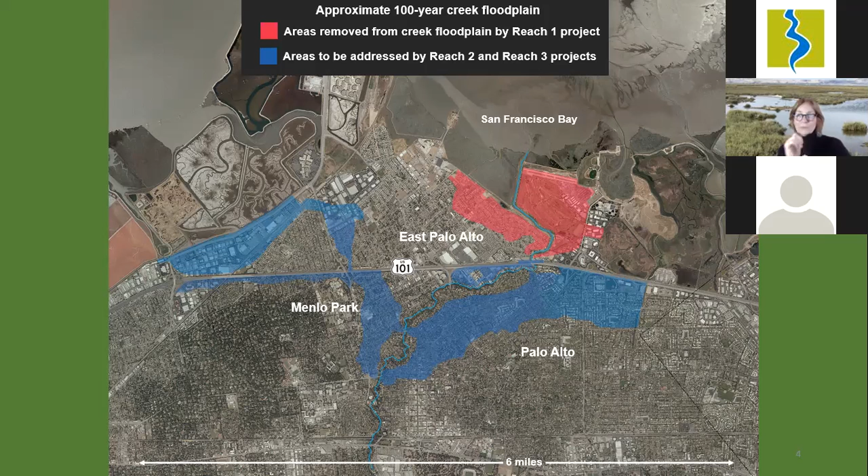This slide shows an aerial view of the San Francisquito flood zones. With the completion of the Reach 1 downstream project, the red areas that you see in Palo Alto, in East Palo Alto, close to the bay, have been removed from the risk of creek flooding. But some of this area is still vulnerable to storm and tidal flooding and sea level rise from the bay. The areas in blue are still vulnerable to creek flooding from areas that break out along the creek between Pope-Chaucer Bridge and Highway 101. And you can see how far that flooding can spread away from the creek banks.

These images are of high water and flooding events along the San Francisquito Creek. There are many properties vulnerable to flooding. In Menlo Park, there are about 800 parcels. In Palo Alto, about 2,100 parcels. In East Palo Alto, 2,900 parcels, particularly those west of Highway 101. The parcels located east of 101 are now protected by the completed Reach 1 downstream project.

Today, properties with mortgages located in the FEMA floodplain must pay flood insurance, which can cost thousands of dollars a year. And according to recent reports, and some of you might have heard a news report just a day or so ago, the FEMA flood insurance program may be raising the cost of flood insurance significantly in the coming years. So we are keen to address that cost impact to our community members.

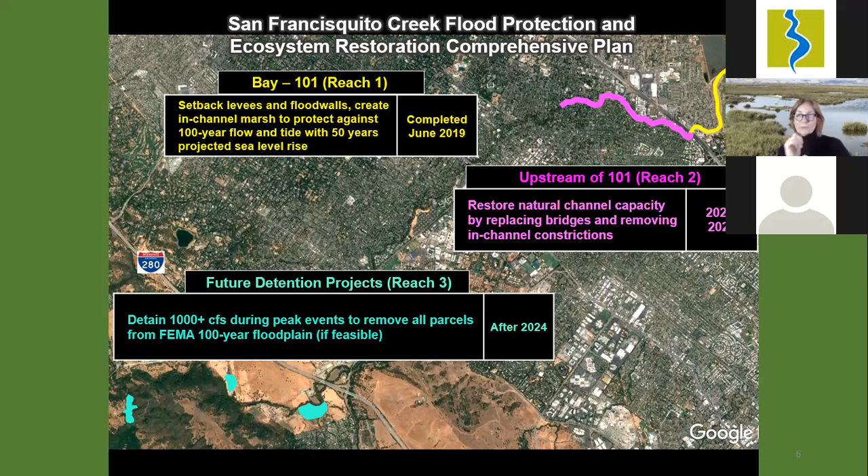Our public process. So many of you have probably been around long enough to know that the JPA went through a CEQA process, but some of you may be new to the JPA and new to this flood mitigation project that we are undertaking. So this is just to quickly acquaint you: the San Francisquito Creek Joint Powers Authority's projects are subject to the California Environmental Quality Act, or CEQA. This Reach 2 project went through an environmental impact report. There were public scoping meetings held in Palo Alto, East Palo Alto, and Menlo Park, and there was an extensive additional stakeholder engagement process.

So if you are new to the area, or if you're unfamiliar with the project, we're very glad that you're joining us now. Please feel free to reach out to me or anyone on my team for more details about the creek, its history, our project plans, or any other details.

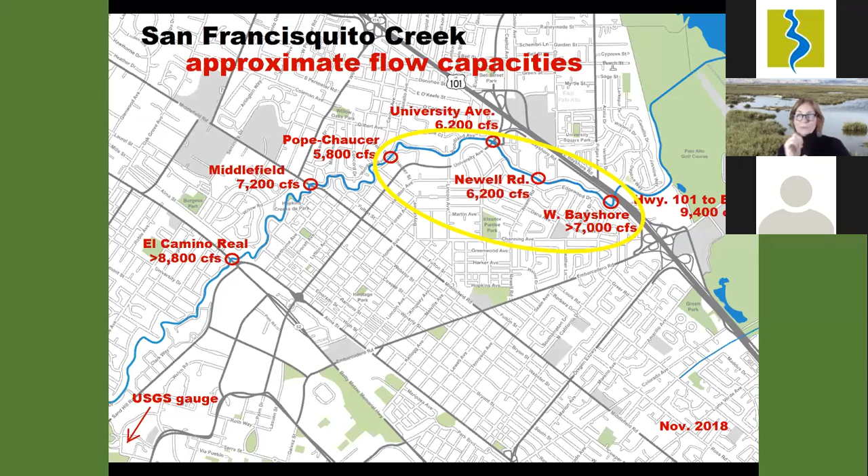So the Reach 2 upstream project focuses on the area here circled in yellow between West Bayshore Road and the Pope Chaucer Bridge. There is one element that is very important to this project, but it is not part of our particular work. Replacing the Newell Bridge is a key piece of the overall flood risk mitigation plan, but this bridge should be replaced before the Pope Chaucer Bridge is replaced to avoid transferring flooding risk to other places along the creek. But the Newell Bridge design and implementation is being led by the City of Palo Alto.

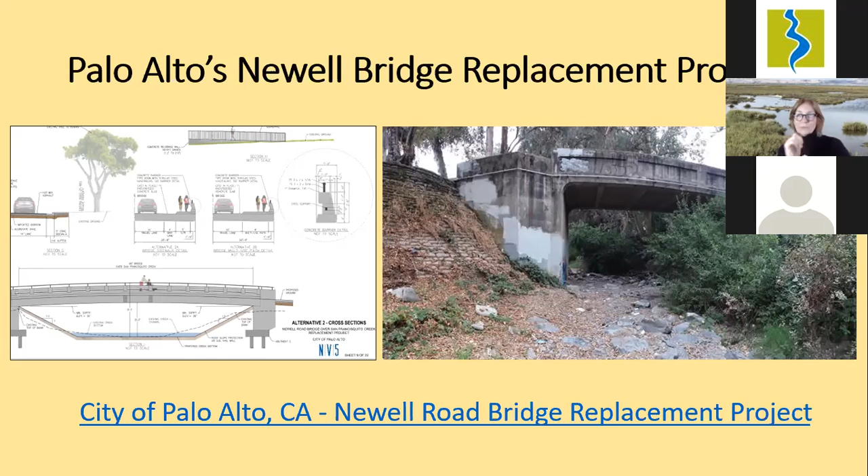And so for information about the City of Palo Alto's work on the Newell Bridge, please visit their project website at the link shown here. Or it's easy to reach just by typing in Palo Alto Newell Bridge project, and this will pop right up. Based on current schedules, the Newell Bridge replacement will be constructed in 2023. Channel widening work that we'll talk about next can begin at the same time in 2023. The Newell Bridge and channel widening should be completed before the Pope Chaucer Bridge is replaced, and we'll continue talking about that.

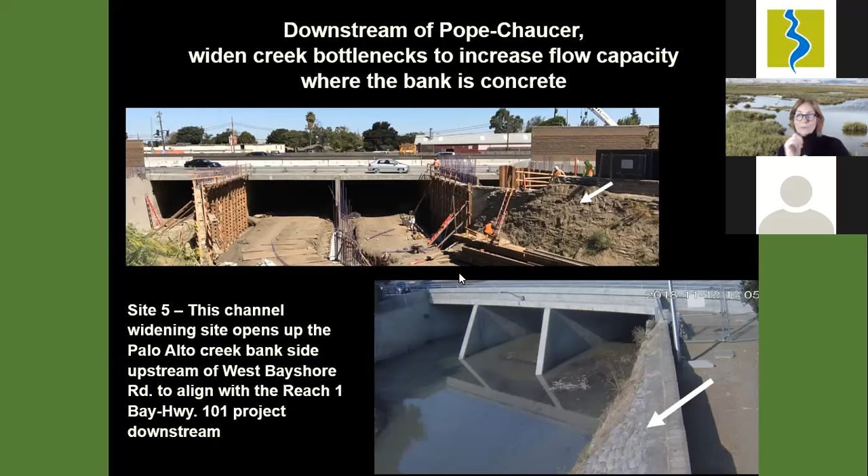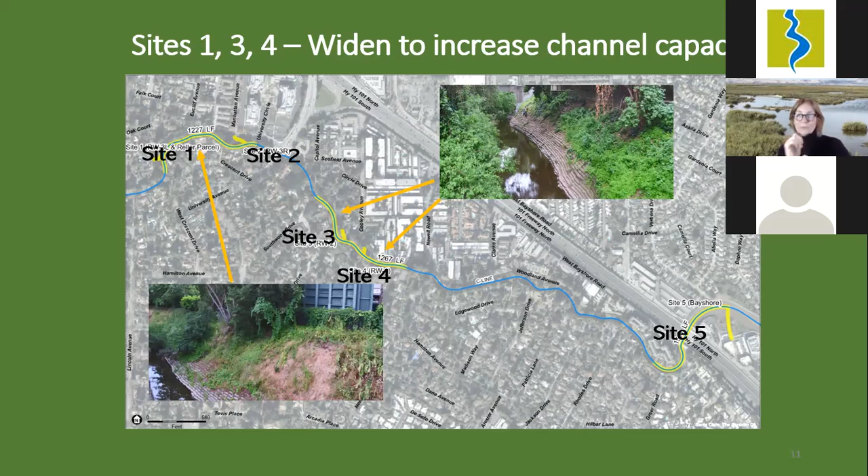We continue to explore a range of channel widening options to optimize ways to minimize construction costs and impacts to the creek and impacts to project neighbors, to plan for constructability, and to address the requirements of regulatory agencies. These additional options may include top of bank treatments on the East Palo Alto side of the creek, or a combination of smaller actions on both sides of the creek. Right now, we are analyzing how high water flows will behave in these various configuration options for each of these three widening sites, Site 1, Site 3, Site 4.

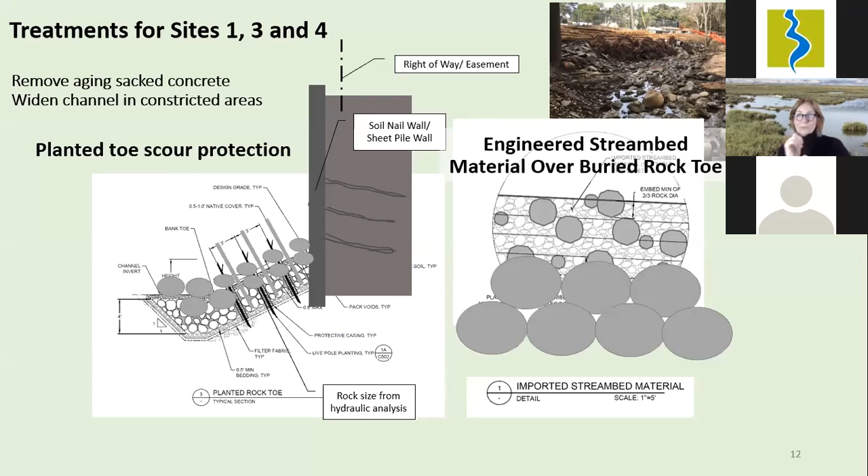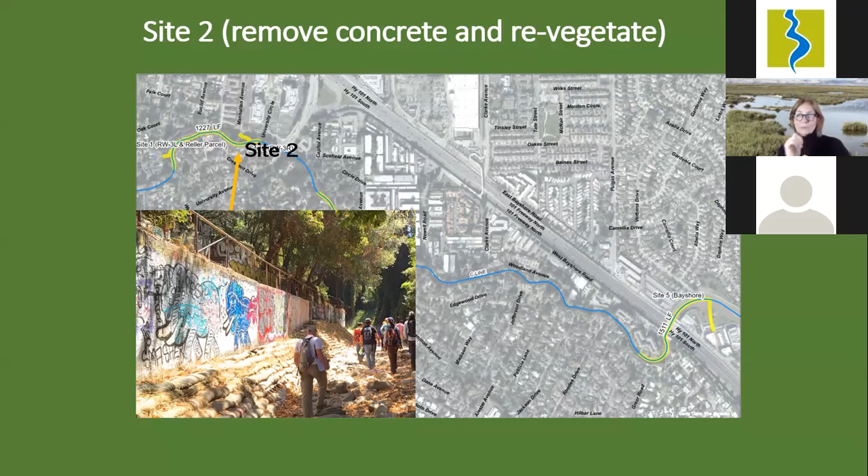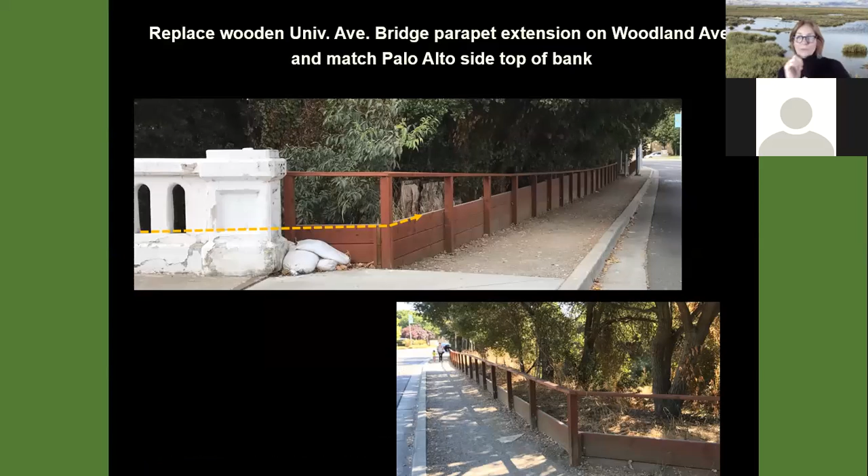At University Avenue, the creek banks are different heights, allowing the creek to break out at this point. The parapet of the bridge in this location will be extended, replacing the existing temporary wooden structure.

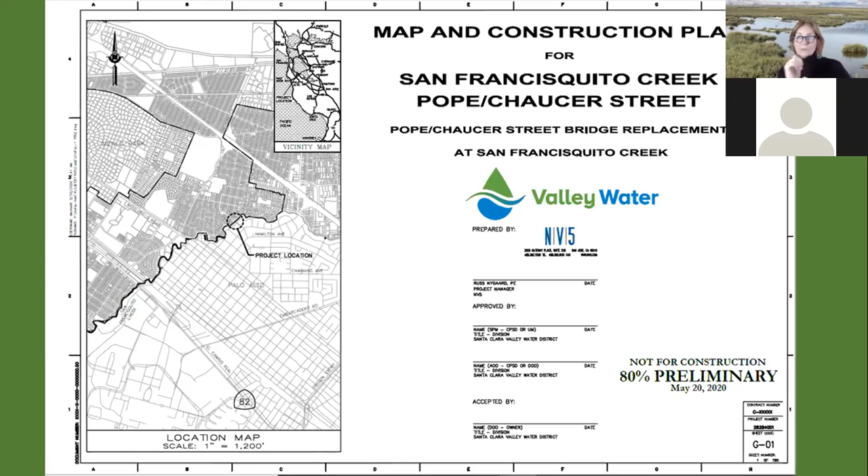And this is a map. This plan map puts the location of the Pope Chaucer Bridge into context. So now we'll move on to our conversation. The next piece is the Pope Chaucer Bridge. Again, the creek widening portions of our work can happen at the same time as the Newell Bridge construction and replacement. But the bridge here at Pope Chaucer needs to be done the successive year. There's no good way to do 2 bridge closures or 2 bridge reconstructions at the same time. This one has to come after.

Sorry. So the constricted capacity of the Pope Chaucer Bridge creates a bathtub effect upstream, which can lead the creek to overtop its banks during high water events. The present bridge is a really thick, long concrete culvert with a flat concrete bottom. The Pope Chaucer Bridge at the top is the current configuration, and the proposed new configuration is at the bottom picture.

The new bridge design accomplishes multiple objectives. It removes the need for any adjacent flood walls by being high enough above the bank tops to let water pass underneath. It expands channel capacity by having a small in-channel footprint. It restores the natural channel water flow capacity. It restores the natural channel bottom, improving habitat. It provides railings for pedestrian and bicyclist safety.

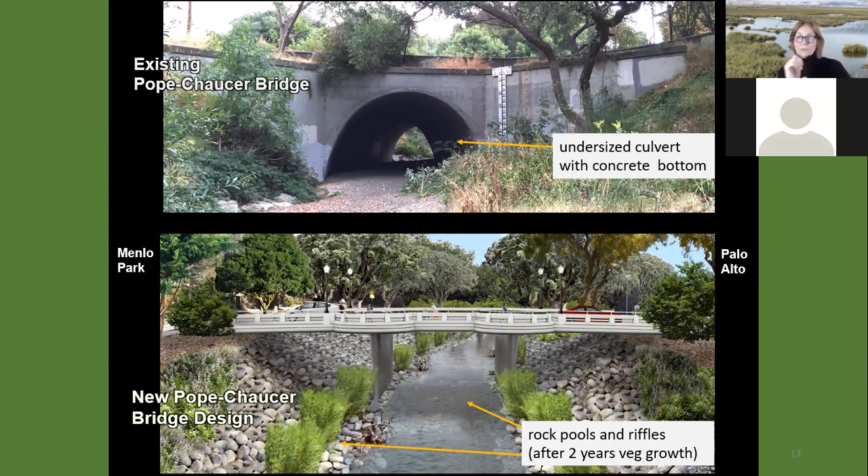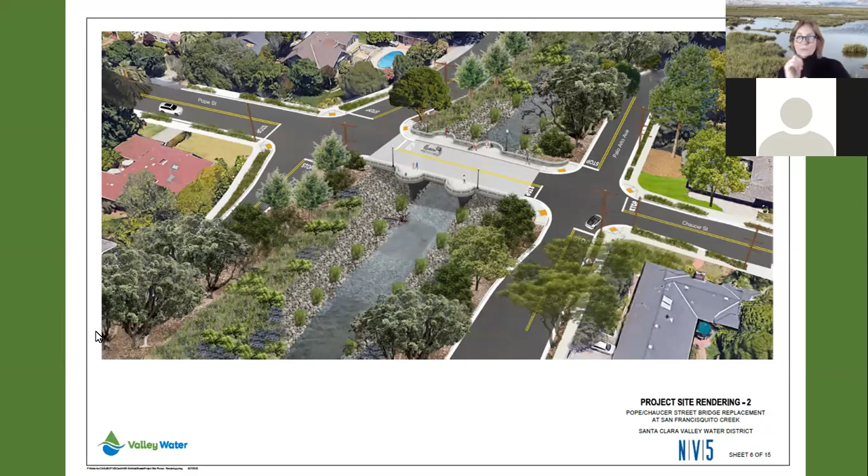It does not include any flood walls on adjacent creek banks, nor retaining walls adjacent to the intersections on either side. It still has a low enough arch that we don't need to change the elevations of the adjoining roads or intersections on either side of the bridge. And this is an aerial view of the bridge and adjoining intersections. So you can see there's no huge rise in the bridge, and the intersections remain at the same elevations they're at now.

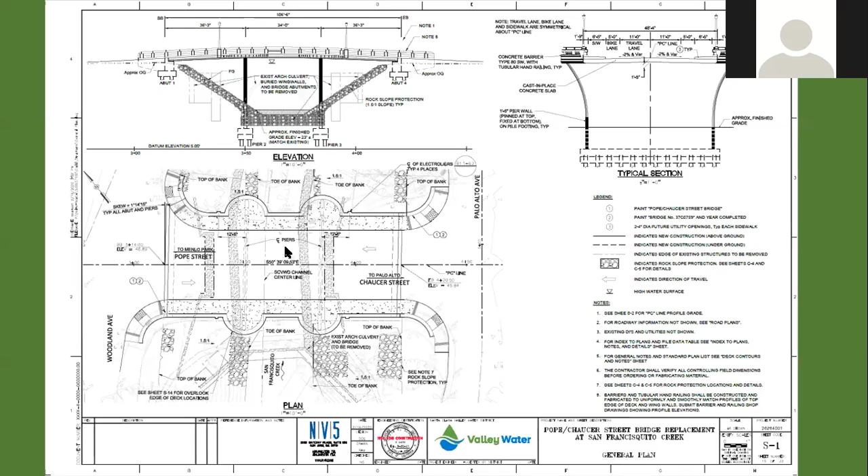This plan view shows also here in the upper right-hand corner, you can see that the bridge does have a slight arch. It's not perfectly flat. There is a gentle rise. And this image here in the bottom part shows there are two bump outs on either side of the bridge, designed to be pleasing places from which to view the creek channel.

This is the top-down view of the bridge plan, and I've shaded in light gray the approximate configuration of the current bridge structure, and the blue lines are where the creek flows. You can see the new lighter bridge design with the two viewing bump outs in the darker blue outline for comparison of size and shape. We anticipate the Pope Chaucer Bridge replacement construction will occur in 2024.

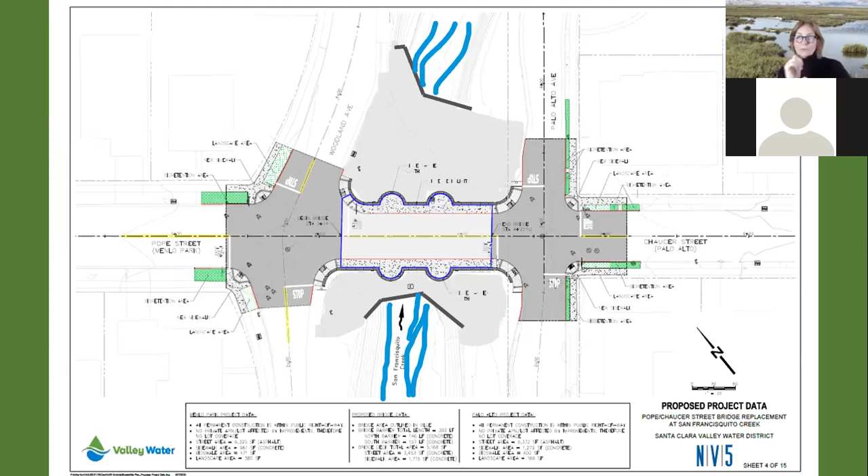So construction is anticipated to take 9 months. That's for the Pope Chaucer Bridge. Depending on conditions, it may begin as early as April and continue until November. Trucks will enter the Pope Chaucer project about 5 houses upstream of Pope Street. Middlefield Road near Woodland Avenue is expected to experience the most significant increase in traffic due to the bridge closure. There will, of course, be an increase in traffic due to construction-related vehicles, trucks, equipment, materials, workers, etc., but that will be temporary.

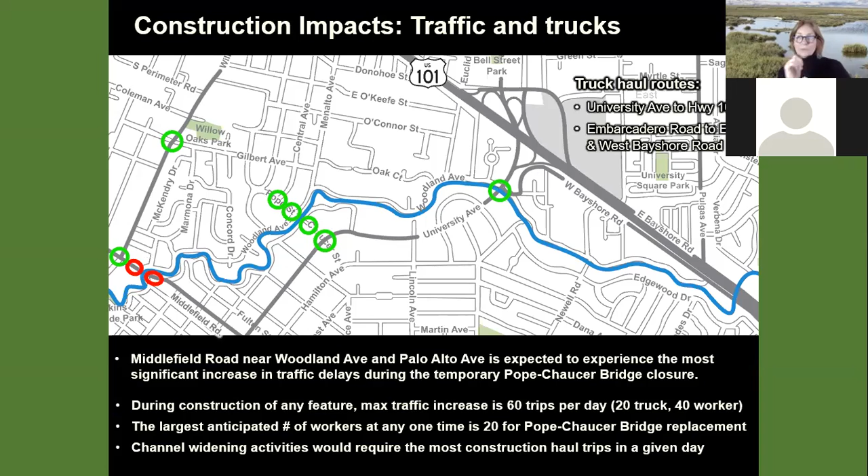Channel widening work will generate the most hauling trips on any given day. And you can see these are the locations where there are likely to be traffic impacts. The green circles indicate where there are likely traffic impacts, and the red circles indicate where there's likely to be the most traffic impact. Construction activities are noisy, and we recognize this impact. These locations near the channel widening locations and the Pope Chaucer Bridge project area will experience the most noise. Construction impacts, including noise, vibration, and dust, will be monitored and mitigated using standard best practices.

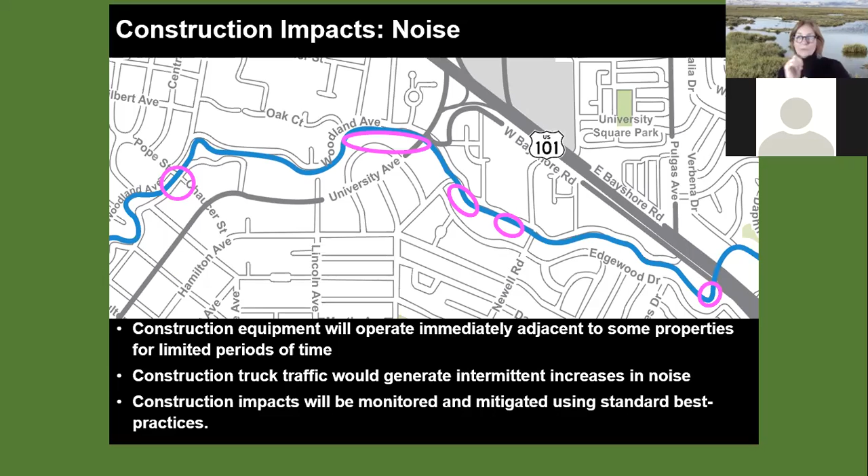There are other potential community impacts. A couple of them are the Palo Alto community eruv and bridge closure during construction. We're working with Rabbi Feldman to identify sensitive areas and are coordinating with our planning and construction contractors to ensure there is no disruption of the Palo Alto community eruv. The closure of the Pope Chaucer Bridge during construction will impact access and egress for the neighborhoods on either side of the bridge. And we'll be working closely with public safety representatives to plan for this temporary circumstance.